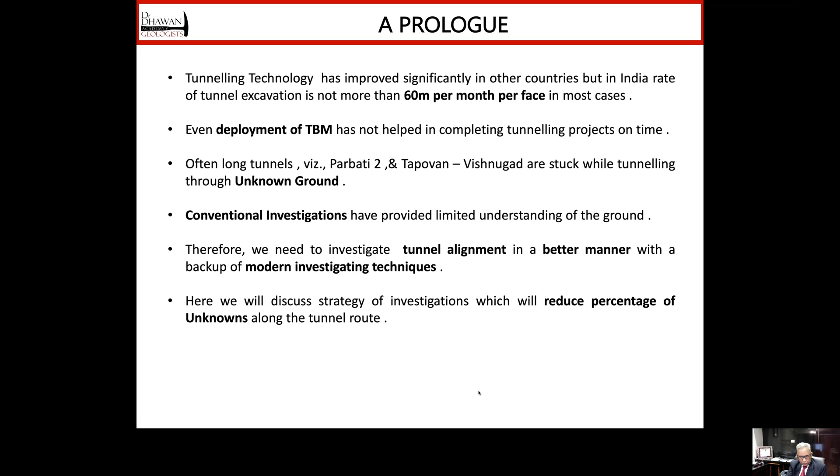Although tunneling technology has improved significantly in other countries, in India, rate of tunnel excavation is not more than 60 meters per month per face. And even deployment of tunnel boring machines have not helped in completing tunneling projects on time. Case studies of Parbati 2 and Tapovan Vishnugad projects are already known to everybody. Here we are still stuck due to unknown ground. Conventional investigations have provided very limited understanding of the ground. So therefore, we need to investigate tunnel alignments in a better manner with a backup of modern investigative techniques. I will discuss with you strategy of investigations which will reduce percentage of unknowns along the tunnel route.

Any tunnel can be divided into three segments. Some portions of the tunnels are well known. You know the geology, you know the type of problems which will come, you know where they will come. So we call those areas as known areas. Then the second type of area is known unknowns. We know the type of problems, but we really do not know where it will come. And the third category is more dangerous: unknowns. We neither know what is unknown, nor know where this unknown is going to occur.

And these are the areas which pose difficulties, problems, and often these are known as gray areas where we encounter geological surprises. With little modification in our approach, which I call strategic approach of investigation, we can increase known areas, and the other two areas will reduce significantly. And therefore, I say that strategically planned investigations will convert gray areas to known knowns to a great extent.

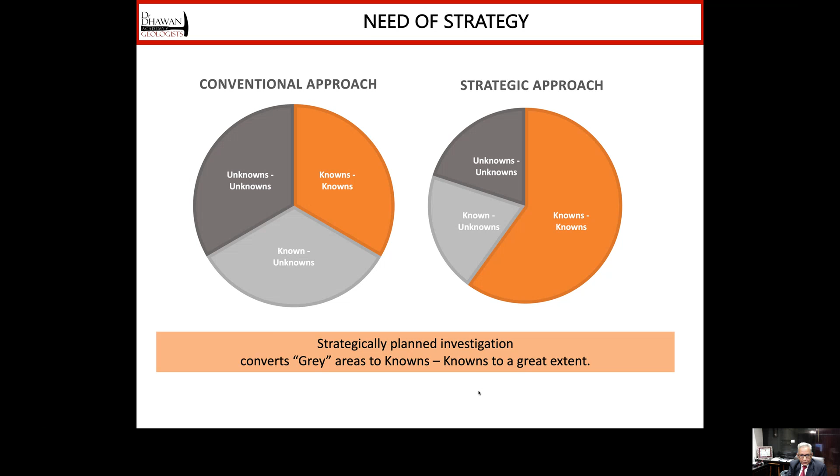And in this kind of terrain, you can't send your truck-mounted drill machines for deeper level of understanding of the ground through drilling. So therefore, unknowns are bound to be present along a tunnel route. But up to what extent? That is to be deliberated.

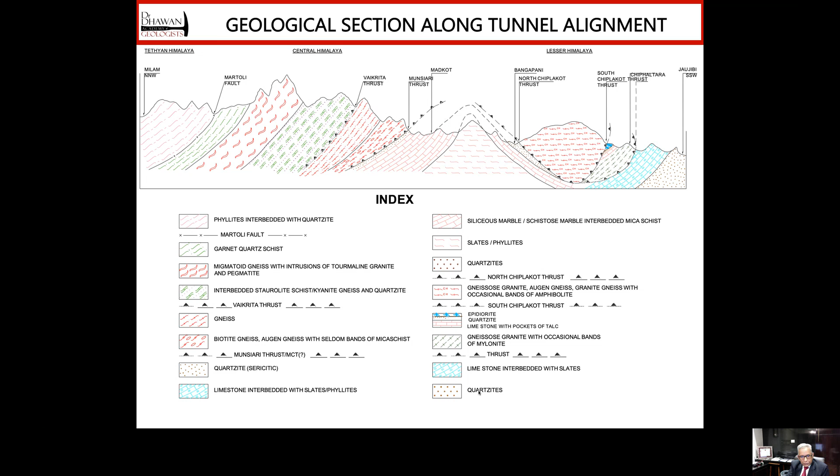So after doing all our conventional geological explorations, we try to produce a geological section along the tunnel alignment. It looks something like this, and various types of rocks which are going to be intercepted during excavation of tunnel are shown with different symbols and different colors. But this is very schematic. This is a very approximate kind of assessment of the geology along the tunnel route. Finally, based on this data, we try to provide inputs to designers in form of rock mass classes. So from geological classification to engineering classification, but the data almost remains the same.

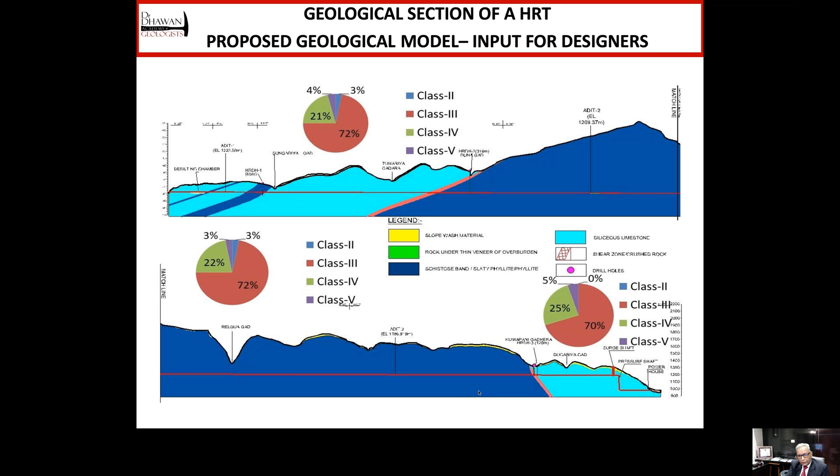So in case our data is based only on surface geological mapping, there will be more uncertainties. And this needs to be improved by good quality investigations with a backup of drilling, geophysical surveys, and modern techniques. And if we do good investigations, there will be less uncertainties, less cost and time overruns, and there will be less claims also.

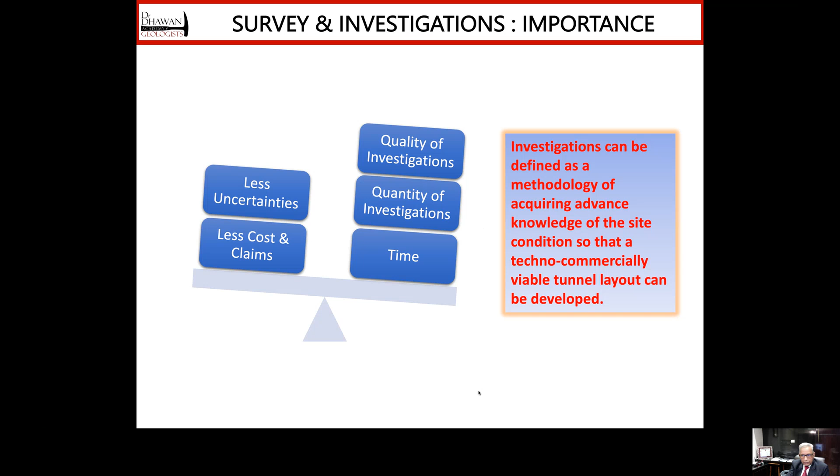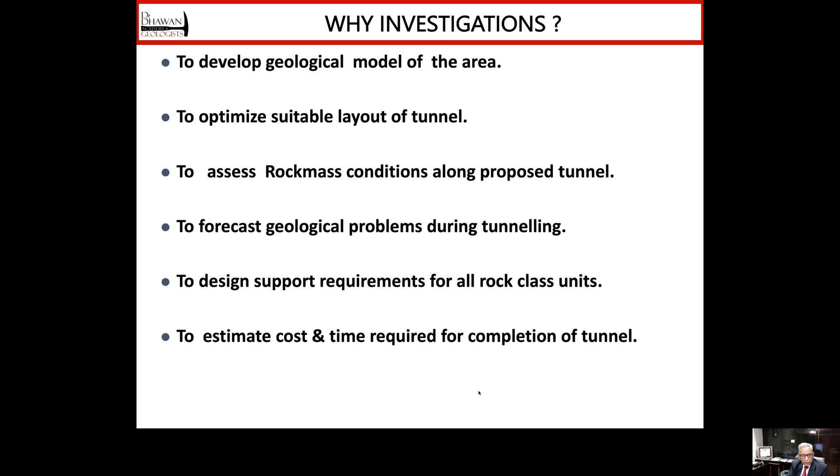Why do we do investigations? Firstly, to develop a good geological model. If the geological model is reliable, the tunnel layout will also be optimized. And then we will be in a position to infer rock mass conditions along the tunnel route properly. If we can do that, we will be in a position to forecast geological problems during tunneling. And finally, we will be in a position to design the support requirements and estimate cost and time required for completion of tunnel.

Normally, you must have heard that investigations are not adequate. So when are you going to say that investigation is adequate? This I will try to explain with help of these two curves. The brown curve, you can follow my cursor, signifies that with more investigations, more investment, we acquire more geological and geotechnical information.

So as our level of investigation improves, we spend more time and more money, we acquire a better level of understanding of the ground. But you will see that beyond 80%, the curve rises sharply, and this becomes almost subparallel to the vertical axis. It means that no matter how much more money you are investing, the level of information is not going to improve. So, in other words, this is the practical limit of data acquisition.

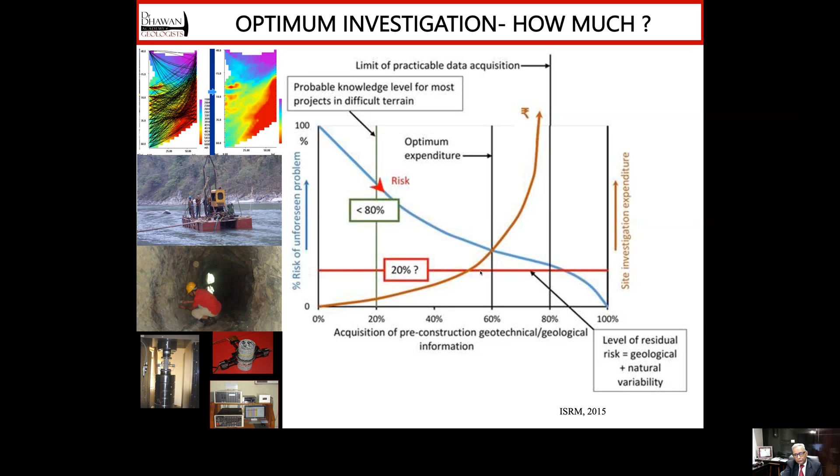On the other hand, this blue curve signifies the risk. As we gather more geological and geotechnical information, the level of risk reduces. Both these curves intersect at a point which is indicated by 60% data acquisition level. This is the optimum level of expenditure and information collected. In other words, beyond 60%, it is difficult or impractical to collect information about the ground during the investigation phase.

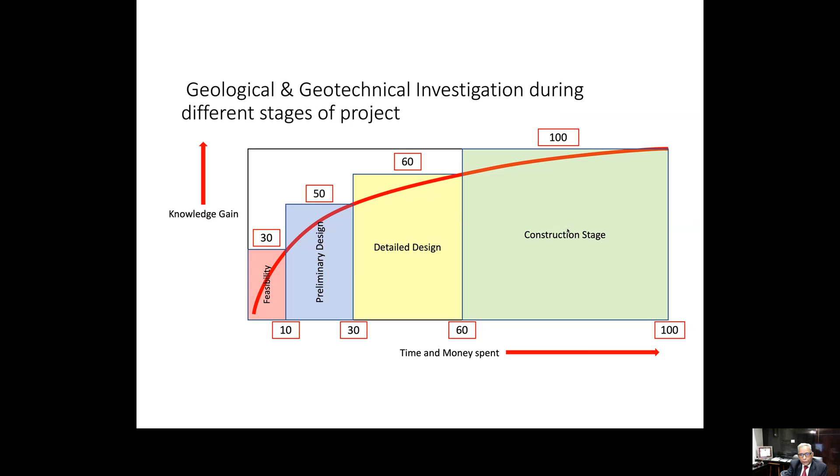And this is the 60% optimum level beyond which the remaining information is collected and used only during the construction stage. So the 40% information is to be collected and utilized during the construction stage. It means that we have to provide certain instruments in our contractual architecture to attend to this type of situations. We need to inbuild scope of certain specialized investigations during the construction stage. Only then we can attend to these problems.

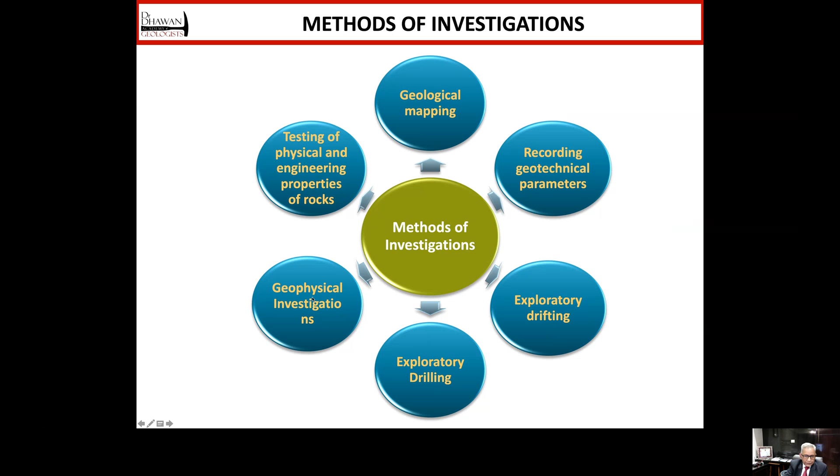Now, what are the methods of investigations available to us? As I said, our conventional method of investigation is geological mapping and then recording geotechnical parameters. In some unknown areas, we need to do exploratory drifting. It means making small horizontal openings within the hill, then doing some drill holes, geophysical techniques, and rock mass properties testing or rock mechanic testing.

There's less time, but I would certainly indicate that with application of LiDAR-based mapping, airborne geophysical surveys, directional drilling, which can go very deep and which can go along the tunnel also, and tunnel seismic prediction system during construction, simultaneously with construction of the tunnel, we can improve upon the level of geological data.

We have some other tools available to us, which are known as engineering classification of rock masses. There are two most widely used classification systems in vogue. In India also these are used, the RMR system and Q system. These were originally designed to estimate the tunnel supports, but nowadays these are improved to a level that we can estimate realistic rock mass parameters from these systems. And these are very useful during the construction for quantifying the rock mass conditions and selecting the appropriate support class.

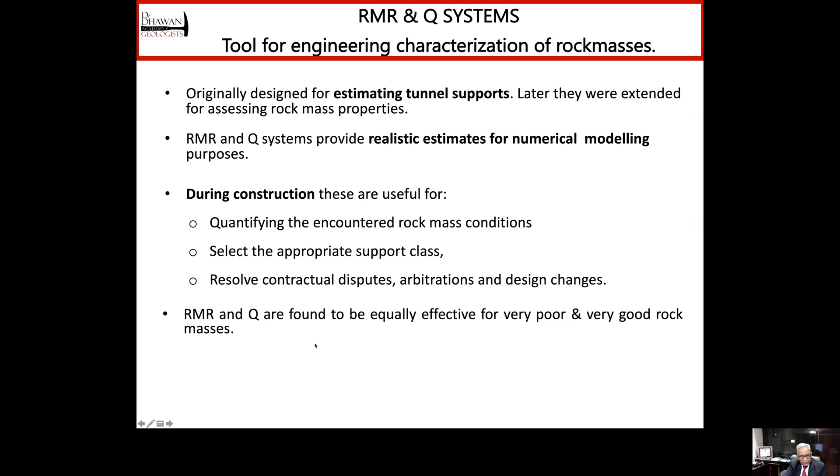We can resolve contractual disputes and arbitration problems due to the design changes. RMR and Q are found to be equally effective for very poor to very good rock masses.

Before the tunnel construction starts, it is necessary to identify geological and hydrological risks. The most commonly occurring risks in the Himalayan tunnels are that the tunnel may run into deep overburden. There may be an unexpected fault zone, squeezing rock or rock burst. There may be some weak zones or fractured rock masses. There may be variation in the predicted rock classes or rock types affecting the completion schedule. This is the most commonly occurring risk which we are facing. And then the groundwater problems.

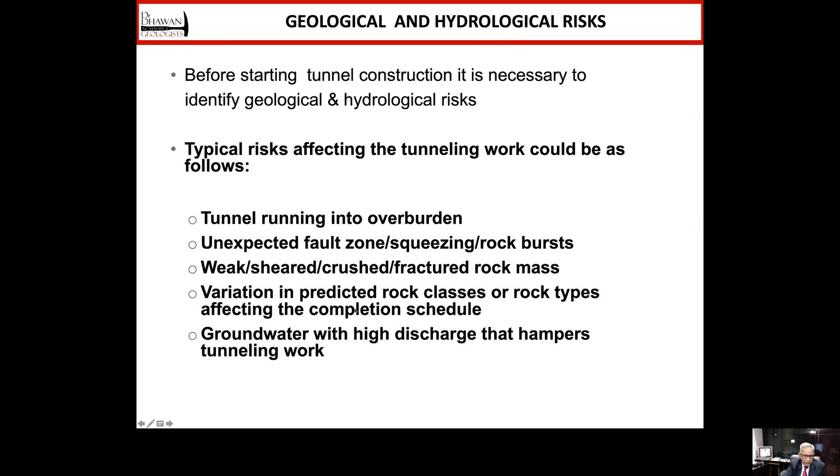All these risks are to be quantified and studied by making a risk matrix. You can have the likelihood of the risk in the row, and then the consequences of that risk in the column, from insignificant to catastrophic consequence, from rare likelihood to almost certain likelihood. And then these are classified into low risk to extremely high risk, that is R1 to R4. So totally the risk can be divided into 4 classes, and for every class we have to have a strategy for implementation.

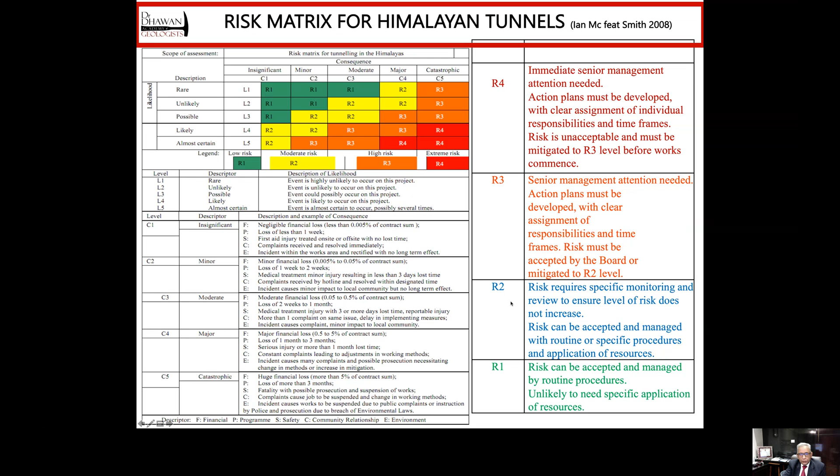Finally, as I said, you can reduce or you can increase the known areas, but you will have to deal with the known unknowns and unknown unknowns, and even thereafter there can be some residual uncertainties. But in case you are able to increase the percentage of known knowns, you can deal with this with good design. Whereas known unknowns can be mitigated by appropriate contractual architecture. And unknown unknowns can be minimized if investigations are embedded in the construction phase. And residual uncertainties will have to be dealt with as they come.

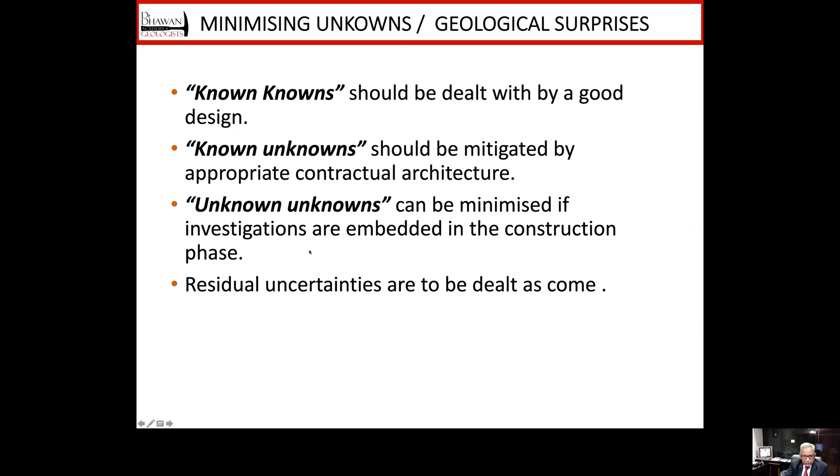So, gentlemen, the key to success for tunneling projects is: investigate adequately. In your contracts, leave some scope for mid-course correction. Choose the right kind of agency, the contractor, and prepare a risk management plan for difficult reaches during construction. And we must do quick decision making in tunnels, and that is going to facilitate timely completion of the project.